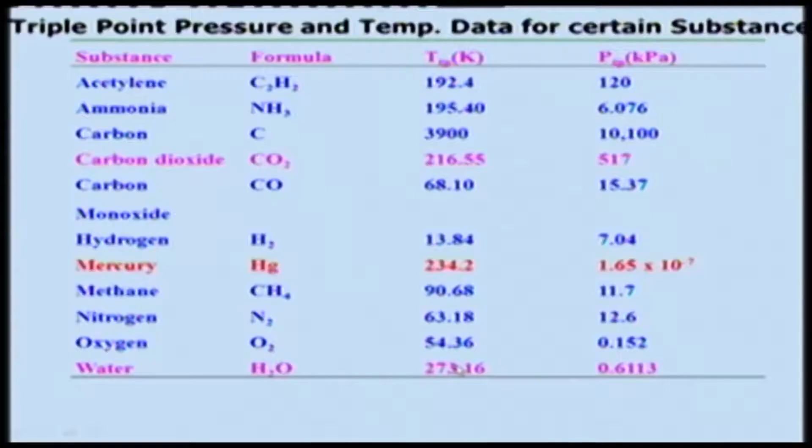As I told you, this temperature is used as a reference for plotting the phase diagram, using pressure and temperature as variables. If you look at this plot, this region is solid and this region is vapor. If you are here and give some heat at this pressure, you will directly get vapor without passing through the liquid phase, and that process is known as sublimation.

However, if you increase the pressure further, in case of water we have seen it is very low pressure, 0.6113 kilopascals, you will find a point which is the triple point, where solid, liquid and vapor exist together. That is the triple point.

If you consider another point, let us say you are here, and you go on adding heat to that solid, say water. There are two kinds of substances: one that contracts on freezing, and one that expands on freezing. We have already discussed that water expands on freezing, which is why ice floats on water. Am I right?

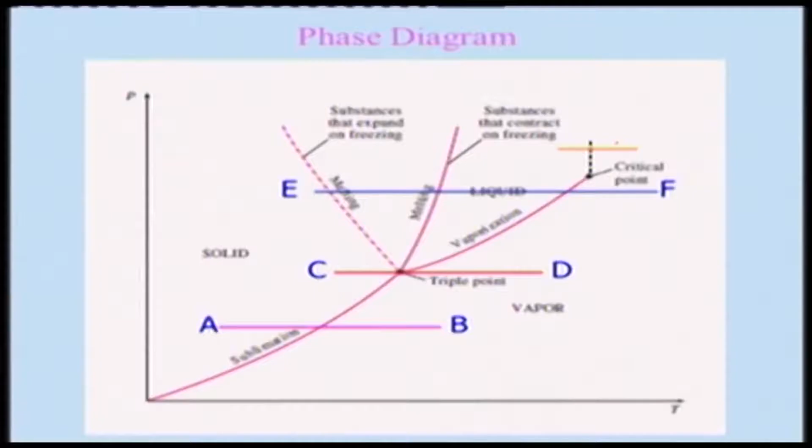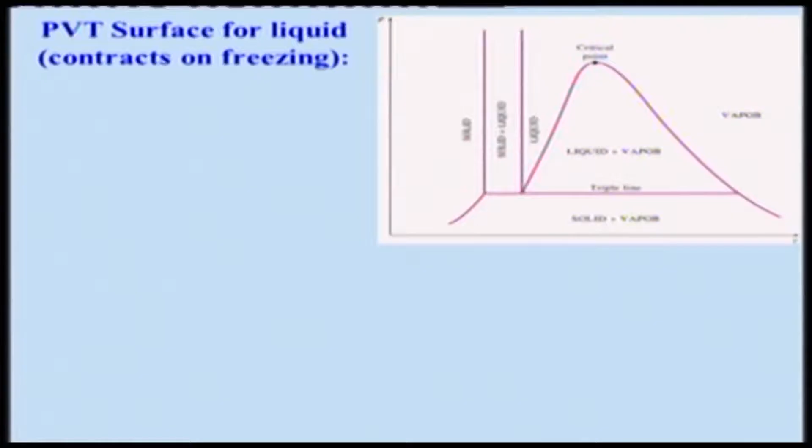So let us now look at a substance which will be contracting on freezing, unlike water. Till now we have looked at two dimensional kind of diagrams, but now I have put it all in three dimensions, that is pressure, volume and temperature.

If you look at this point, these are the points for the solid and vapor region, and this region is the solid. This is the line which you call the triple line. This is solid liquid, this side is solid, and this side is vapor and liquid, and this side is vapor. And of course, this is the critical point where both vapor and liquid will be existing.

And this is the substance that, as I told earlier, contracts on freezing, unlike water. Water expands on freezing, that is why its density becomes lower and the ice will be floating on the water.

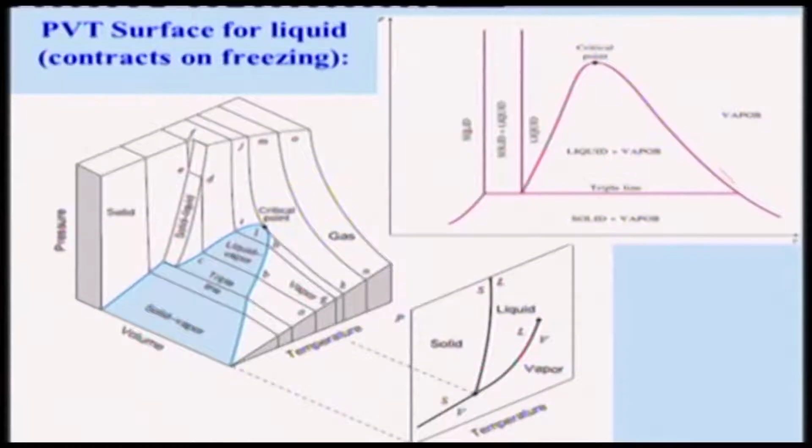And of course, if you do that for P and V, if you look from this side, it will be plotted like this, and this is liquid and vapor. As I told, this will be the triple line, this is the liquid region, there will be a solid and liquid region, and there will be a solid region. This will be valid for most substances except water.

Now we will consider another situation where liquid expands on freezing, that is water, and it will have similar features, like it will have solid in these regions, and there is a liquid-vapor region and this is a solid-vapor region, and of course this is the vapor region and this is the critical point.

If I just plot here the pressure and temperature, it will have a similar liquid and vapor region line and this is the solid and vapor region line. But here this has changed compared to the previous one - the solid liquid line, its slope has changed. Earlier it was like this, and it has been changed.

So if you look at this line, if I plot from this side, that is pressure and volume, I will get this, which is basically volume. So I will get the liquid vapor region here and this is the vapor region. However, in this region it is different - you can't go directly from liquid vapor, you will get solid here. In this region it will be solid and liquid, and that is the liquid region. Because it expands, below this point it will go directly to the solid.

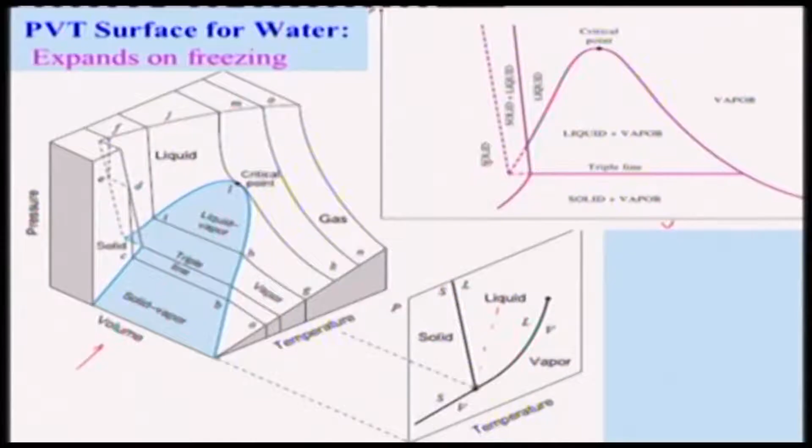Let us look at this phase diagram of water, which is quite interesting. Ice will have something around 7 solid phases. Similarly, if you look at carbon, it will have 3 phases - carbon, graphite and diamond. Similarly, you can think of liquid helium having 2 phases.

Here the solid ice is phase 1, and this is also a triple point. If I consider this as a triple point, one side is solid, another side is solid, another side is liquid. But if I consider this point as a triple point, it means 3 phases are existing together - one side is solid, another is solid, another is solid. So it is really possible, and similarly one can think of other points here - this will be solid, solid and liquid.

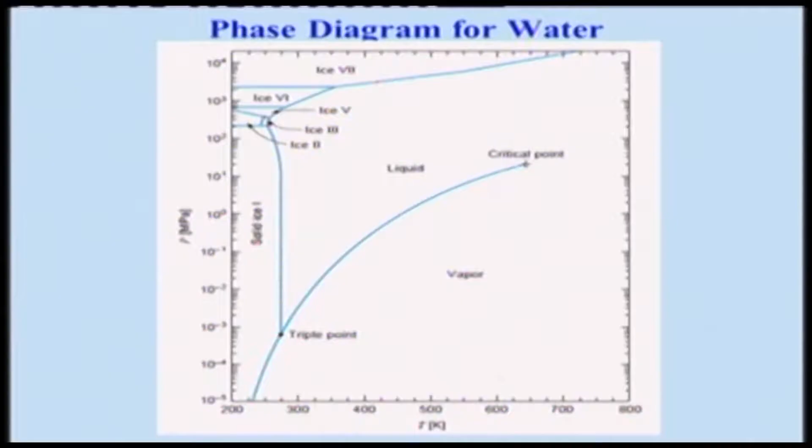So I thought I will show you this diagram, which is quite interesting, that ice has 7 solid phases. This phase transformation, going from one solid phase to another, we can call it solid allotropic transformation.

Let us look at the phase diagram of carbon dioxide. It is similar in nature, but if you look, it has a little difference - it is moving this way, generally the diagram will be like that, but it goes this way. The important point is this triple point, where all 3 phases exist - if you look at this pressure, it is above atmospheric pressure. Whereas for water, it was below, because atmospheric pressure is something around 100 kilopascals.

Now if you are at atmospheric pressure in the gas form, it can be converted directly into solid form. So if I consider this as atmospheric pressure, the gas can be converted directly into solid form at a temperature less than 200 Kelvin. That means if I extract heat from the carbon dioxide at atmospheric pressure, and if it reaches less than 200 Kelvin, then it converts directly into ice. We call it solid carbon dioxide or dry ice. That is why this carbon dioxide is being used, one can think of.

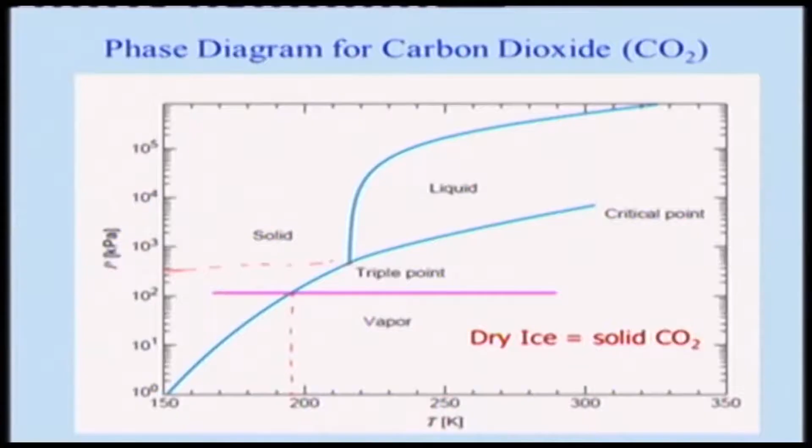All these properties we have seen are in terms of temperature, pressure and specific volume. But thermodynamic properties we need to talk in terms of entropy and enthalpy, because for our analysis we need that, and these properties can be shown on the HS diagram. H is enthalpy and S is entropy, and this diagram was made by Dr. Richard Mollier. Therefore this diagram is known as the Mollier diagram.

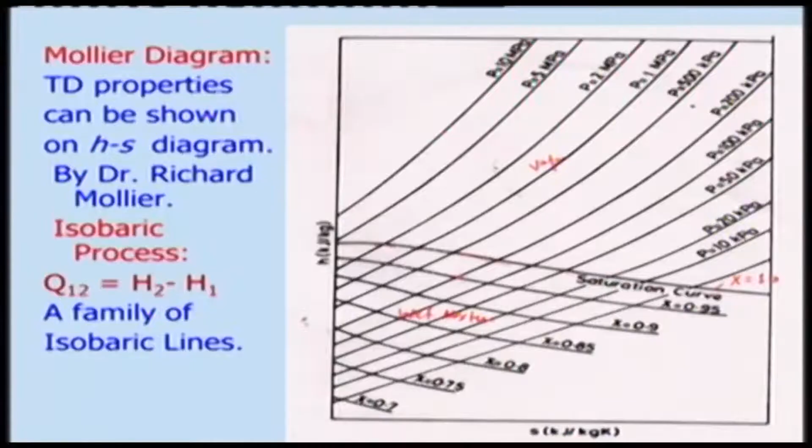Earlier days we used to use this diagram to evaluate the properties. For example, if I take a particular pressure line, let us say 200 kPa, and if I know some weight fraction - for example at 200 kPa, if my weight fraction is here, and this is the isobaric process, I will go from quality of 0.95 to, let us say, 0.8, moving here to let us say 0.85. So what is happening? I can get directly the enthalpy at this point. This enthalpy change will give me basically how much heat is being added, or the change in enthalpy - that enthalpy I can get directly from this chart.

What are the problems I will face with this? For example, if you find that your X, the quality, is not 0.95, it may be 0.96, then you will have to interpolate, and there will be a lot of error involved in that. But you can get quickly the data from this plot and evaluate it, and you can also feel what is happening at constant pressure and other things you can think of.

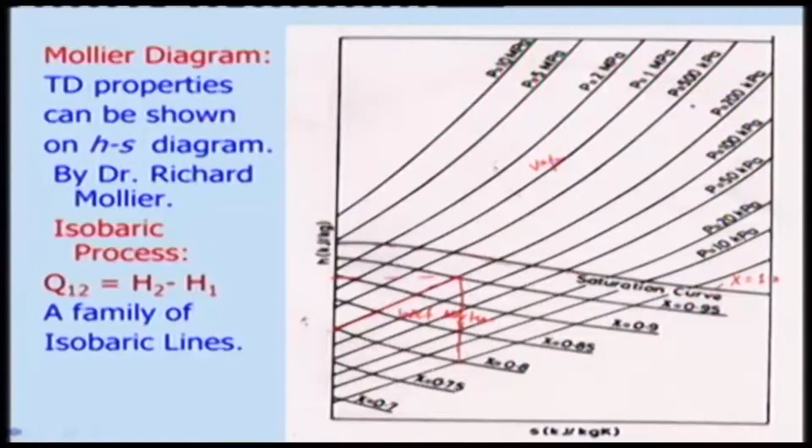It is not only the constant pressure process one can think of, one can find out what will be the isentropic process from here. For example, I can move from this point vertically down and find what will be the quality, pressure, and other properties. I can get all the data from here, like quality, pressure, enthalpy, all those properties from this diagram, that is the Mollier diagram. Earlier these diagrams were used very much, but nowadays less used because it is a bit inaccurate. However, this diagram is helpful to visualize what is happening instead of doing mundane calculations.

Keep in mind that the critical point is not shown in this case, but if you look at a bigger kind of diagram, one can think of using that.

So what are the disadvantages with graphical data? Because what we are looking at is not only the processes, from this we can find out the graphical data which will be useful for our calculation. The value from these diagrams or the Mollier chart or any other kind of diagram will not be very accurate, and it is difficult to read properly, so that is one disadvantage.

The interpolation of data, as I told you, suppose you want to evaluate the quality at 0.96, however in the diagram it is given as 0.95. So if you want to use it, it will be inaccurate, you will have to approximate on paper. That leads to loss of accuracy of the data, and a limited amount of data can be presented in a diagram. You cannot put everything because it will be very clumsy and cluttered.

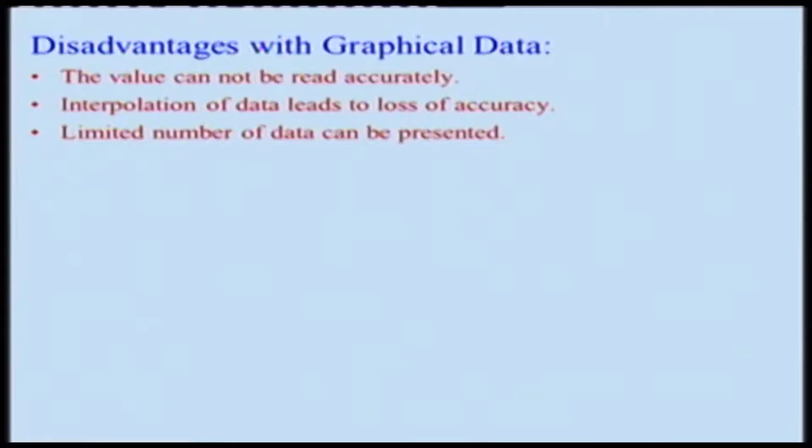So that is the limitation, and for most substances the relationship among thermodynamic properties is too complex to be expressed by a simple equation. You may ask why not express it in equations - that is really difficult to do, but as we progress, maybe we can find a relationship which can take care of that. That is an open challenge, to have at least a semi-empirical relationship which can be utilized, but till now people have not been successful in giving an expression accurate enough to be used for calculation.

Some thermodynamic properties can be measured easily, as I told, like pressure, volume, temperature. But there are several which cannot be measured, for example entropy, Gibbs free energy, Helmholtz free energy, enthalpy, and internal energy. So those can be calculated by using the properties which can be measured. But we need to have a relation between these things, which we will be discussing a little later on, and by that one can do that.

And the partial derivative of a property is not readily available, so its estimation is quite difficult, leading to loss of accuracy, because with graphical data one can think of using it for a particular pressure or certain measurable properties. If that is not available, then you will be in trouble, and there will also be loss of accuracy.

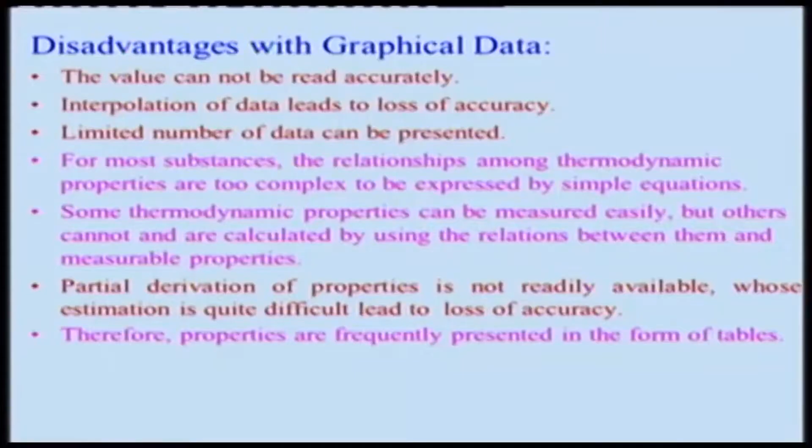Therefore, that is the reason why properties are frequently presented in the form of tables. Because of these disadvantages, we need to keep the data in tabular form, which we will be discussing, particularly the steam table and the refrigeration table. I will be discussing more the steam table; in your tutorial classes, the refrigeration table will be discussed.

So let us look at this property data in tabular form. As I told, properties are frequently kept or presented in the form of tables so that they can be easily utilized. As I told earlier, these measurable properties can be utilized to find the non-measurable properties, using thermodynamic relations. The result of these measurements and calculated values of all the properties can be presented in a tabular form in a convenient format, because format is also very important - how you present the data and how it can be extracted.

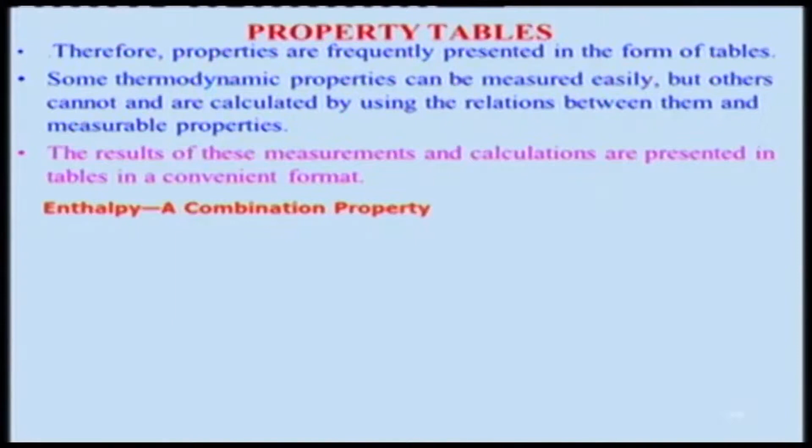Let me tell you, I have already talked about enthalpy, but the implication of enthalpy is that it is a combination of properties which we use in our flow systems. As I discussed earlier, we use the control mass system and control volume system - the closed system and what we call the open system, where flow takes place. In that case, we basically use internal energy, let us say at station 1 and station 2.

So, it will be having certain flow work, that is P1V1, and otherwise the flow will not move, and it makes the flow to move. You can think of as if a piston is there and it is pushing the fluid to get into this, and also it is going out. We will be discussing that little later on.

So, the fluid is leaving this control volume with the internal energy U2 and the flow work of P2V2. So, that together combination of U plus PV being utilized in the open system, and we call that as enthalpy.

And if you look at this, PV is basically in the unit of joule. Pressure is in kPa, and the unit of volume is meter cube, that becomes kilojoule. And if we use the specific volume, that is meter cube per kg, multiplied with the pressure in kPa, you will get kilojoule per kg.

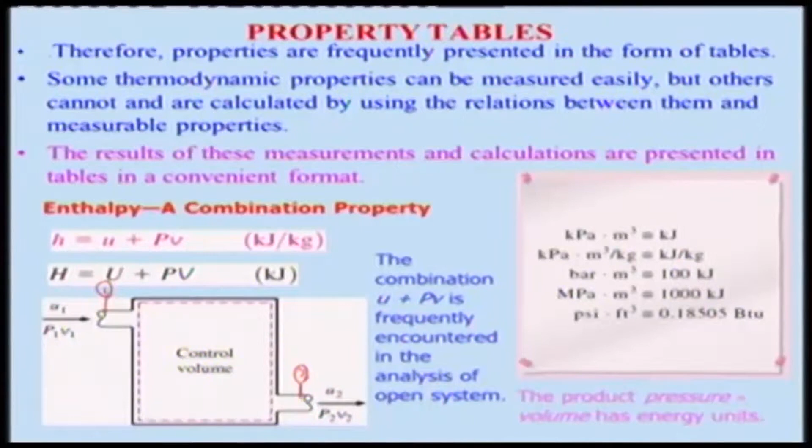So, the steam table, which we will be using very frequently for getting the data for solving problems. It can be represented in tabular form in the following manner, but before we could look at it, we need to understand how many variables we can put and what will be the format of the steam table.

For that, we will have to use the Gibbs phase rule, that is F equals C plus 2 minus P, where F is the degree of freedom, C is the number of components needed to represent the system, and P is the phase.

So, if you look at steam, component wise it will be water, so C will be 1. But there might be several other things, like if you look at petroleum products, it will be having several compositions, so their composition need not be 1, it will be several of them.

So, let us consider that we are interested in two phases, liquid and vapor. That means the phase will be 2, and then what will be the degree of freedom? Degree of freedom will be 1.

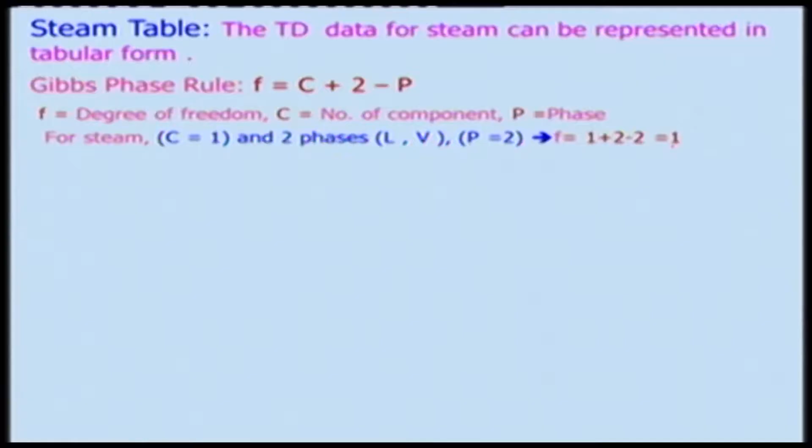What is the meaning of that? That means for the complete specification of a state of a system, when we are talking about two phases and a single component substance, then one independent thermodynamic property, either pressure or temperature, is sufficient to describe the system. So, that is the reason why, knowing this, we can find out properties like internal energy, enthalpy, and entropy, and so on, like Gibbs free energy, Helmholtz free energy.

But however, these properties cannot really be measured directly, as I have told several times, and they can be related to the change of energy of a system. This derived data can provide values to the change in internal energy, change in enthalpy, change in entropy, but not the absolute values. Absolute values you cannot really assign to these quantities, and hence we need to have a reference state.

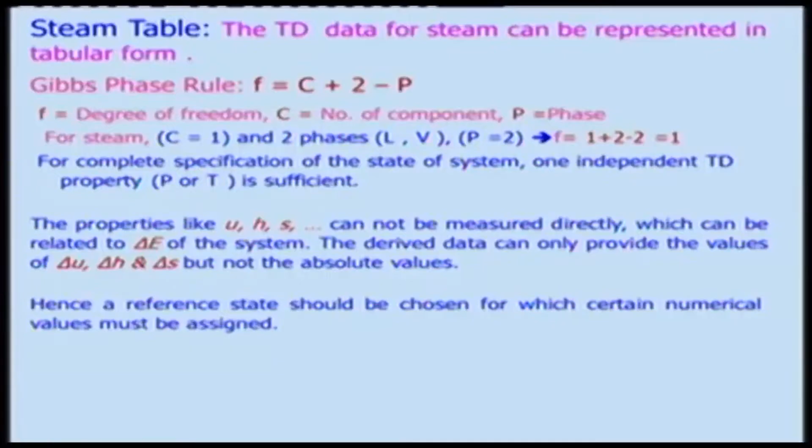And generally this reference state should be chosen such that these numerical values must be assigned, the way we have done for temperature kind of thing. That means you need to assign certain values to the reference.

So, reference point is taken as the triple point of water for these substances. If you look at steam, that corresponds to a temperature of 0.01 degree Celsius and pressure of 0.6113 kilopascals. At these conditions, entropy, internal energy, and enthalpy can be considered as 0, and then we will change positions and get the values.

So, choice of this reference point does not affect the actual data. You can have a different one, but this is the internationally accepted triple point as a reference point, as a change in thermodynamic properties is basically what is required. So, therefore, we have a reference point, and then from that you will evaluate, because what we will be getting is delta U. So, you should have a known reference point and then calculate what it would be.

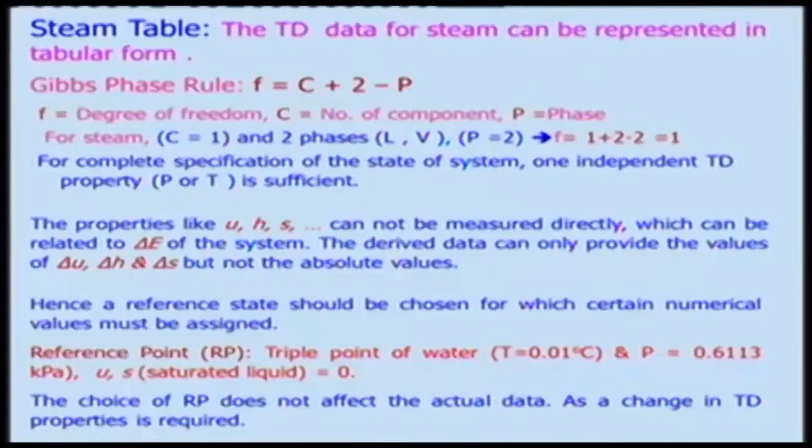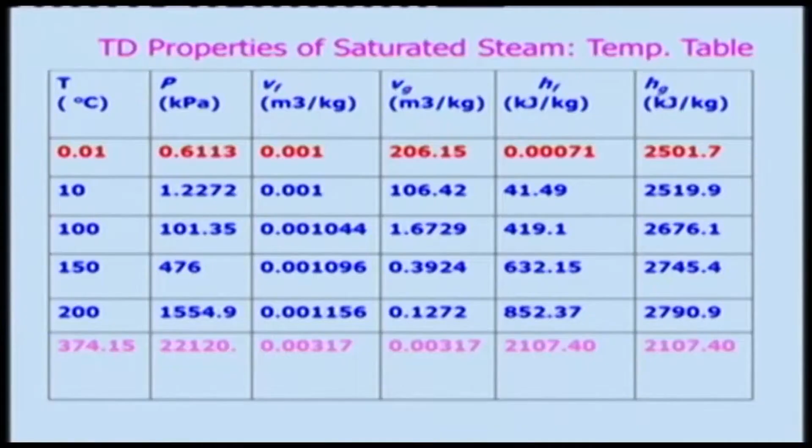If we could have the relationship, if you look at this table, all this data is not linearly fitting, otherwise you could have an expression and do that very beautifully. You need not worry about the steam table or refrigerant table and put the data in tabular form if it were linear. Keep in mind that the relationship between this data cannot be expressed in linear form, but however, we will be using linear interpolation between the two data points just for approximation's sake, and this is approximate because we do not have any better way. As the interval will be small, that is good enough to take a linear interpolation.

For example, if I take a temperature here corresponding to, let us say, 150 degrees Celsius, I can get properties from the table, 0.3924 meter cube per kg, and this is known. So this point is known, and you will be knowing either the temperature, so that you can find out the specific volume, and if you know this temperature you can find out the specific volume at this point. But you need to find out what will be the specific volume here. That means, for that I need to find out the temperature, then I can find out the specific volume. For that, what will we do?

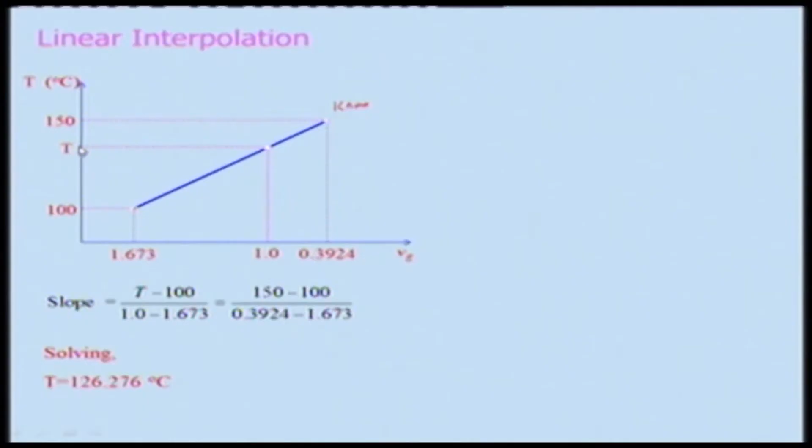We will have to use this slope because this is linear, the slope is the same. So I can say T minus 100 divided by 1, and 0.3924 equals 150. If I know this specific volume corresponds to 150, and this portion is known, then I can evaluate what the temperature will be. There might be a situation where you know the temperature and can find the specific volume instead. Vice versa, you can do it.

So if you want to handle saturated mixtures, you can find out the quality, and from knowing the quality you can find the specific volume.

If I know the internal energy or enthalpy at the saturated liquid point, and if I know HFG or Hg, where Hg is the saturated vapor enthalpy, then I can find HFG. HFG is nothing but Hg minus Hf. So if I know this, I can find the enthalpy for any quality.

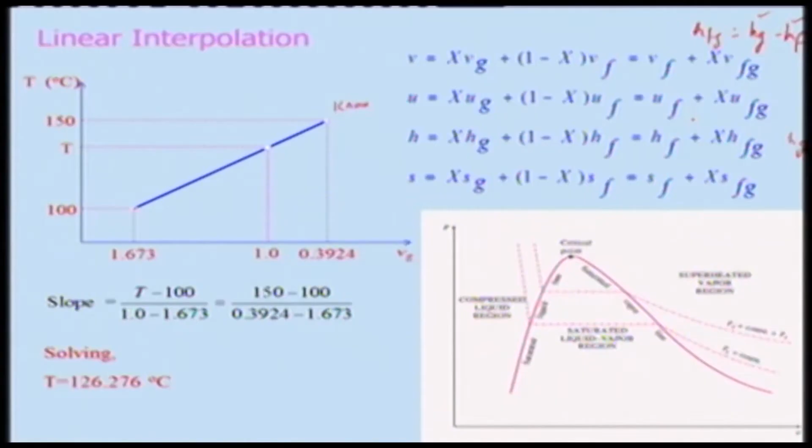Similarly, I can find entropy and other properties like internal energy and other things.

Let us take an example to illustrate how to use the steam table. In a piston cylinder assembly, 1 kg of saturated liquid water is vaporized completely at 100 kilopascal, and we need to determine the volume change and amount of heat energy added to the water.

So that is what we need to do. The mass is 1 kg and pressure is 100 kPa, and we need to find out the change in volume and enthalpy. So how do we go about this?

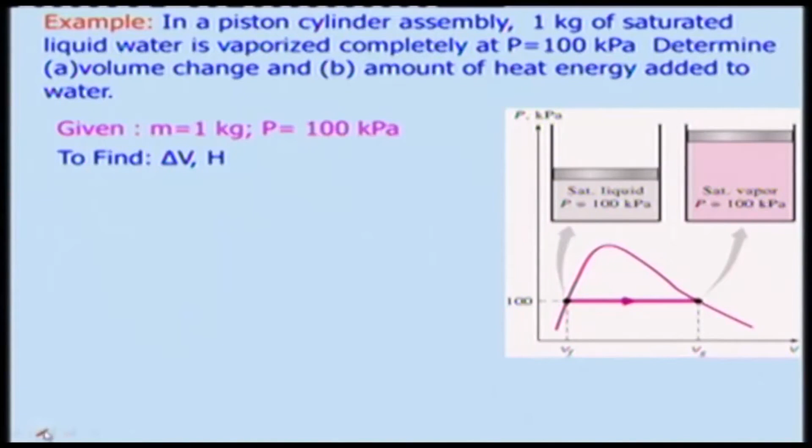Let's say change in volume - how will we do this? Basically, change in volume will be change in specific volume into mass, that gives the change in volume. So in this problem, at 100 kPa this point is known - this is basically the saturated liquid point.

From the table, at 100 kPa I will know what Vf is, and similarly I can find the saturated vapor value. In this problem, liquid water is vaporized completely, meaning this point. So if I know Vg from the table, I can easily find the change in volume. From the saturated steam table at 100 kPa, we can get these values.

Vf is very, very small - keep in mind this is 0.001043 meter cube per kg, very very small. And Vg is of course very high, that is 1.6949 meter cube per kg.

We can also find Hf, which is 417.46 kilojoule per kg, and Hg is very high, that is 2258.01 kilojoule per kg. And if I know these values at 100 kPa...

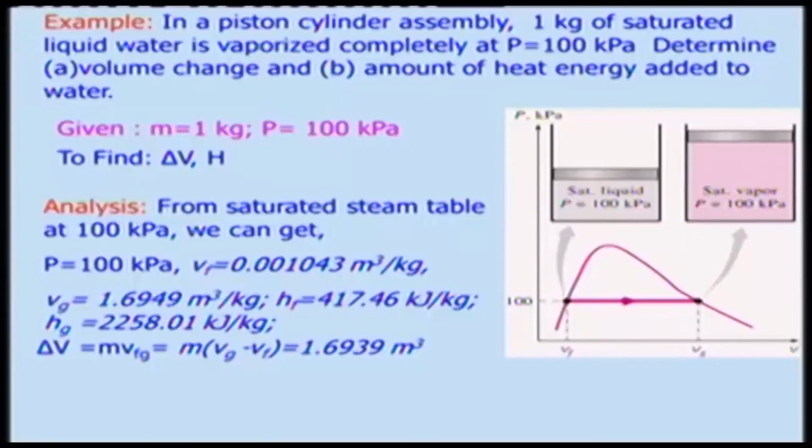Similarly, we can find the enthalpy change during this phase change process. So it will be the same: delta H equals m into Hfg, which equals m into Hg minus Hf, and Hg and Hf are known. Hf is known, this value is 417 - you substitute these values and you will get the amount in kilojoules.

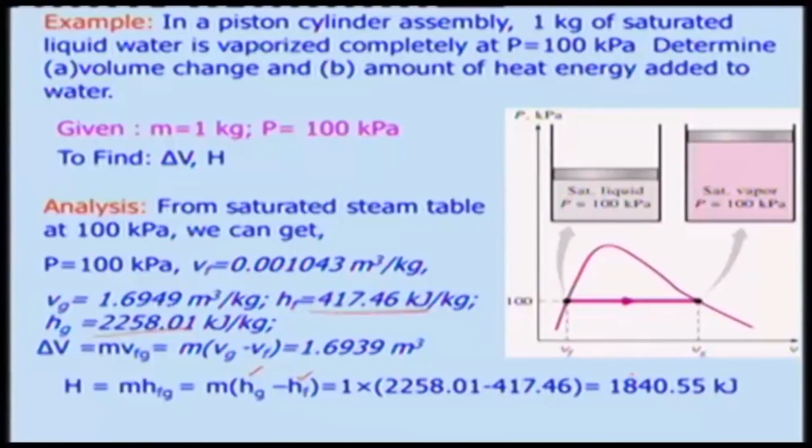We will stop here, and we will take a few more examples in the next lecture on how to use the tables and what problems are associated with it, and later on we will move into how to talk about gases or the relationships. Thank you very much.